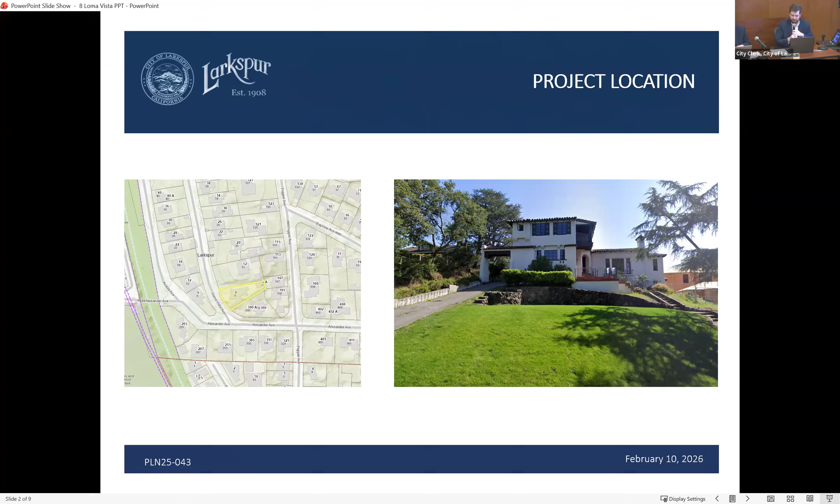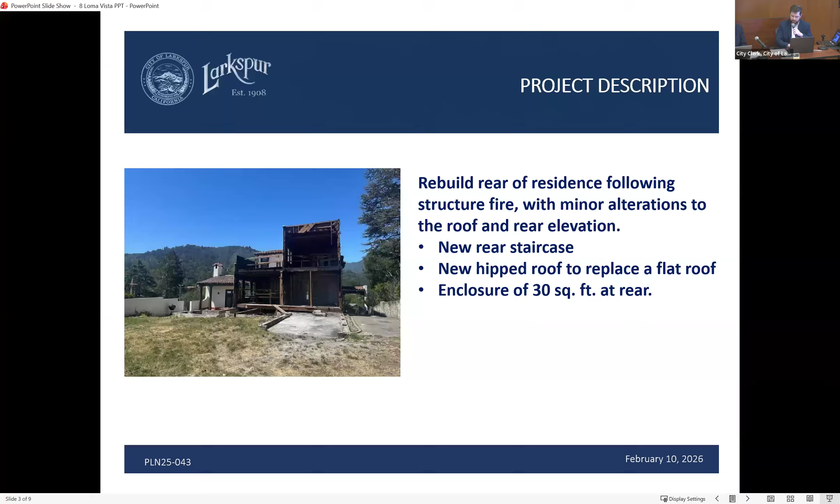As you may or may not be aware, there was a structure fire in 2024 that essentially demolished the rear of the home, and the owner has been pursuing the means to reconstruct it. For the most part, the proposal would be just to reconstruct the residence like-for-like to what it was before the fire. However, there are a couple changes that have been proposed which do require design review entitlement: a new rear staircase, a new hipped roof which replaces an area that was previously a flat roof, and then a small addition that infills some negative space behind the garage.

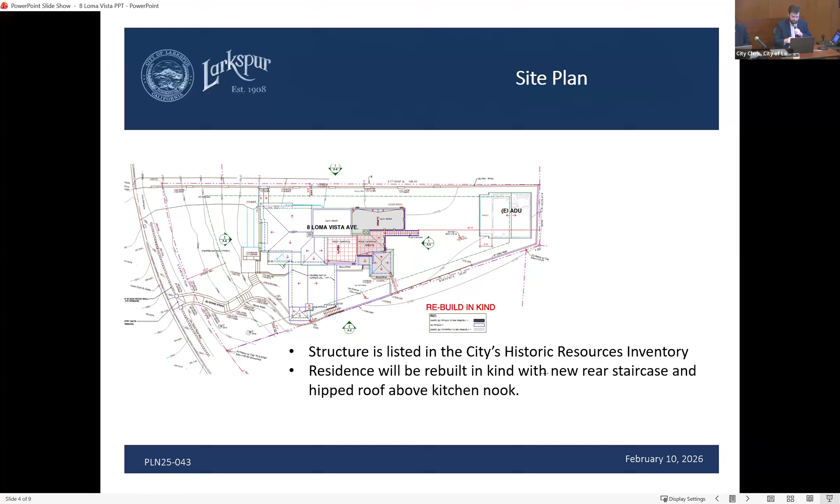So here's the site plan for you. The areas we're talking about here that were damaged by the fire, you can't really see the darker gray here, but it's all at the rear of the structure. And then the staircase here is just coming off of the back. The structure is listed on the city's historic resources inventory, and I will get into the Heritage Preservation Board's review of the project a little bit later on. But as I said, it will be rebuilt in kind with only a few minor alterations.

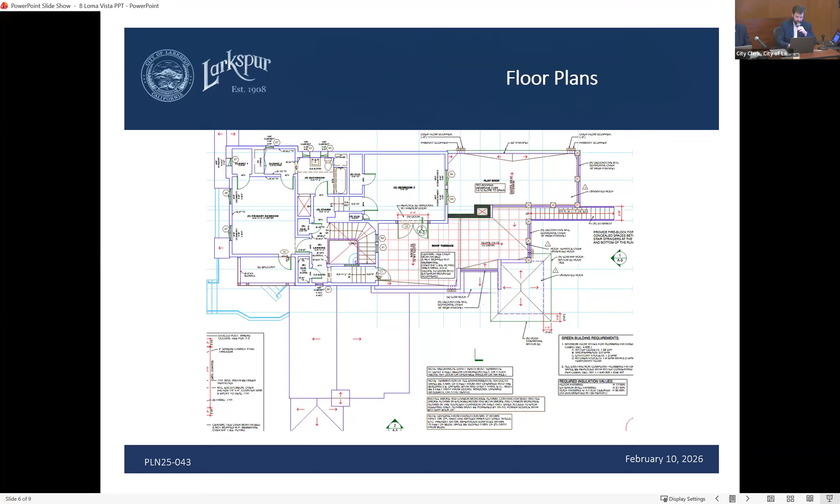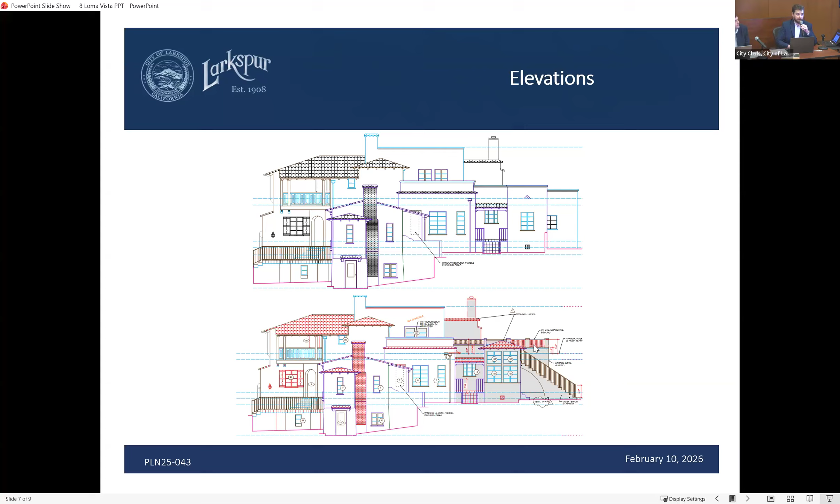Because the structure is listed on the city's historic resources inventory, it was reviewed by the Heritage Preservation Board and evaluated by an architectural historian. The architectural historian found that the project complies with the Secretary of the Interior standards because the proposed work is differentiated from the existing structure. There are no conjectural features being added, and work occurs on non-primary elevations. The Preservation Board reviewed the materials and voted to forward a recommendation of approval to the Planning Commission.

You've received no public comments on this project, so staff's recommendation is that you hold a public hearing, consider public testimony, discuss and approve the project subject to findings, conditions of approval, and Class 1 and 31 CEQA exemptions. Thank you.

Does the architect or the owner want to make a comment? No, I had a quick question.

I wandered up to the back of the house. It looks like it's already built. Is there more being added or is that it? So they've been going through kind of a long process. What they've been approved for is to rebuild the portions of the residence that are not being altered, so that they can continue to work on the project while they got approval to modify the hipped roof and the rear staircase. So everything being done out there should just be basically reframing the rear of the residence, but not constructing the work that we're here to discuss tonight.

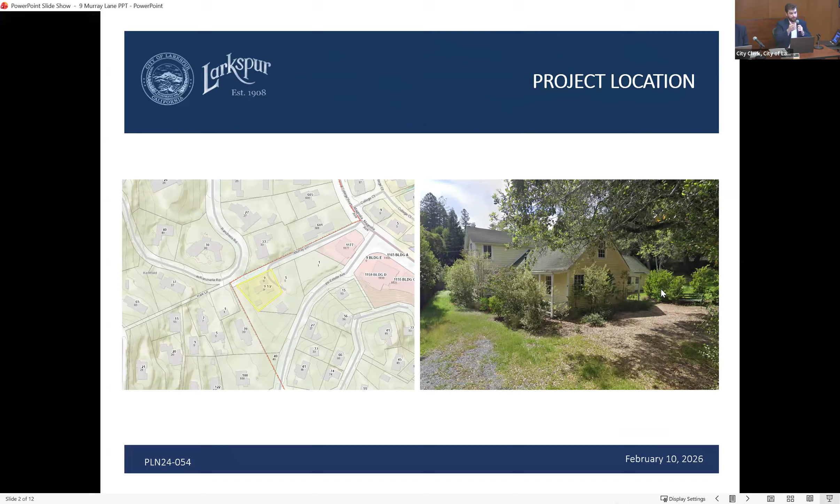Let me share my screen. The project before you for this item is PLN24-054 for 9 Murray Lane. It's basically all the way north along Magnolia, then west along Murray Lane, right at the edge of the city jurisdiction. There's a street view on the right and an overhead shot on the left.

As you've heard, the project proposes an 1,814 square foot addition to the first story of the existing residence, including a new 2-car garage and living space. There's a 49 square foot addition to the rear of an existing workshop structure, and the new ADU, again included for context only. As designed, it requires the Planning Commission to approve design review and a heritage tree removal permit. Here's the site plan so you can get your bearings.

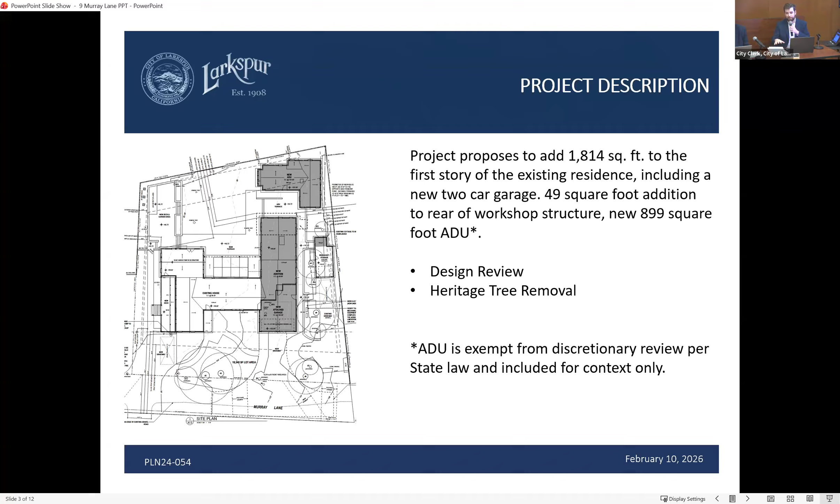A similar project came before the commission a couple of years ago, I believe 2022, under a previous owner, and it was never completed. This is a largely similar design, but there's no second story proposed in this current iteration, whereas there was one in the prior proposal. There is, of course, a second story on the existing house.

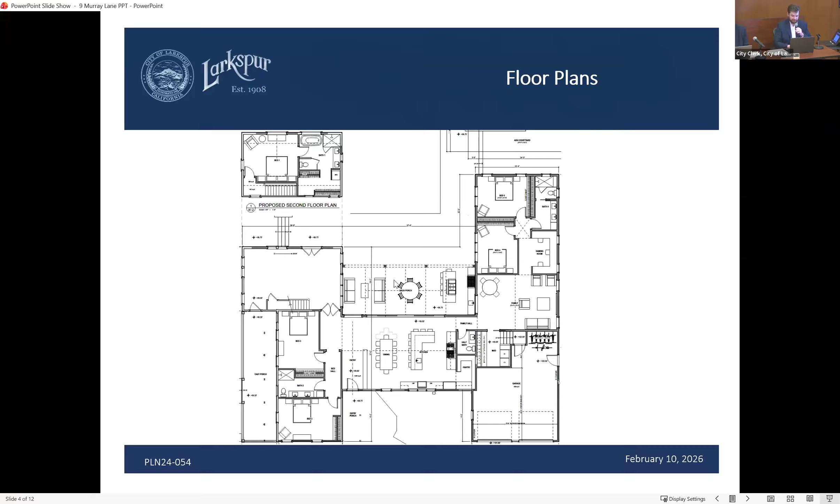Here are the floor plans. This wing being added includes the 2-car garage and living space: bedrooms, office, living room. There's also work to recreate a patio area along the eastern elevation, one of the primary facades, plus improvements to the rear patio. And here are the elevations of the residence, before and after.

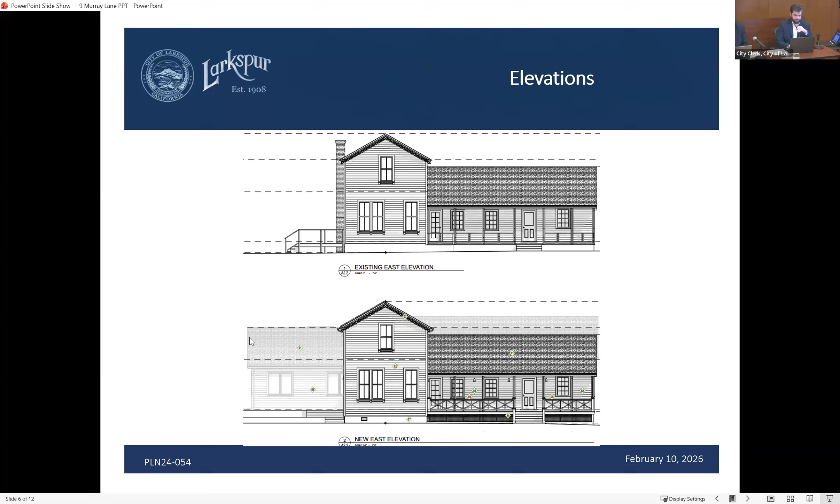This is the most prominent elevation for the proposed wing. You can't really see it here, it's a little grayed out, my apologies, but the addition would extend all the way out to the edge of the drawing. This is the rear of the residence, and finally the front, which is what you'd see going down Murray Lane, with the new 2-car garage.

In addition to the design review request, they are seeking approval to remove 2 heritage trees: a valley oak with a 63-inch circumference located at the front of the lot, and a 60-inch circumference coast live oak located within the footprint of the proposed garage. For both, the valley oak sits in an area where the fire department requires a residential turnaround, which needs to be improved, graded, and paved, which would kill the tree.

And then the coast live oak located in the garage, I noted in the staff report. Certainly there are ways to reconfigure an addition to retain it. Because it's a listed historic resource, it's really important that we don't alter the footprint in such a way that it is incongruous with the historic resource itself.

Or have any kind of issues with the primary facade and changing the layout of the residence. So staff supports both removal requests. I believe there are a total of 6 trees being removed, but the rest do not meet the size definition of a heritage tree.

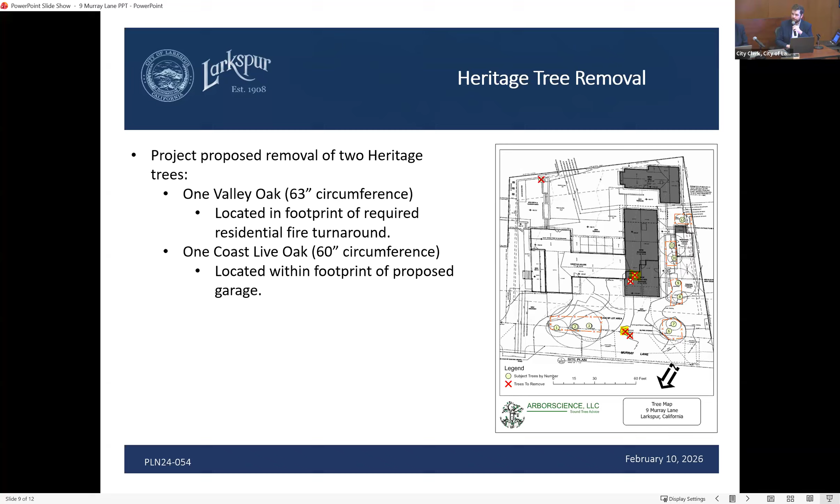This project again was evaluated by an architectural historian who found it complied with the Secretary of the Interior standards, as the historic house will be retained and preserved. The proposed work blends well with the existing, and the original massing profile and roof lines remain unchanged. This was reviewed by the Heritage Preservation Board at their January meeting, and they voted unanimously to forward a recommendation of approval to the Planning Commission.

You have received one public comment on this application from the owner of 601 College Avenue, requesting assurances that the proposed drainage system is adequately designed to capture stormwater runoff, as that has been an issue for them. I'll note that the Public Works Department has reviewed the plans and found no red flags with their proposed drainage plan. I believe the applicants have brought their civil engineer to discuss the matter further tonight.

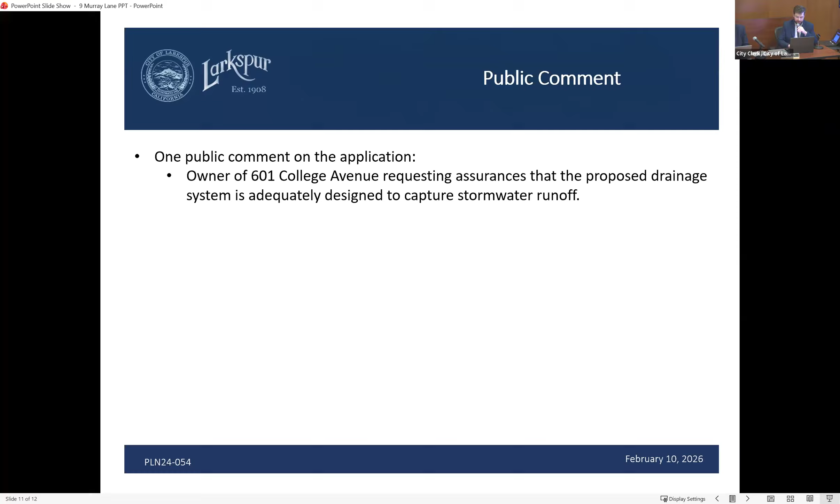With that, staff recommends that the commission hold a public hearing, consider testimony, discuss the project, and approve the project subject to findings, conditions of approval, and a Class 1 and 31 CEQA exemption. That concludes my report.

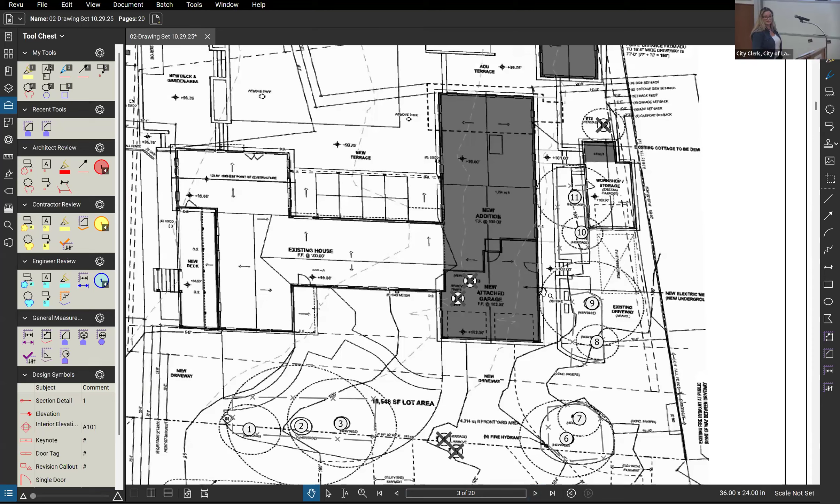Yeah, okay, we have the revised report with that not being taken off. Okay, that's what I was looking off of, before the meeting started. So that needs to be corrected. Okay, so that's it. All right, thank you very much.

Are there any other public comments? When you'd like to comment, please raise your hand. No hands raised on Zoom. Okay, and we'll take it back to this time. We'll start with you.

Well, I respect the concerns of the neighbor, who apparently owns the lane, which I didn't understand before tonight. But it sounds like there is a drainage plan. And I'm not a civil engineer, so I'm going to have to defer to the experts, and our own public works director.

So I hope that they are correct. I am still a little concerned about the email from the family at 601 College. They're saying that the drainage is not sufficient for the two homes that are there now. So I am concerned about that, but I'm trusting that you guys have done the calculations, done the mapping, because it sounds like it won't be a good idea if it doesn't work.

You've got neighbors behind you and next to you. So I do think that the plan itself, from a design review standpoint, I agree with the heritage preservation that it looks like it all matches. It's all going to be the right type of siding, although I noticed that the historian kept saying that they assume. So I'm assuming as well.